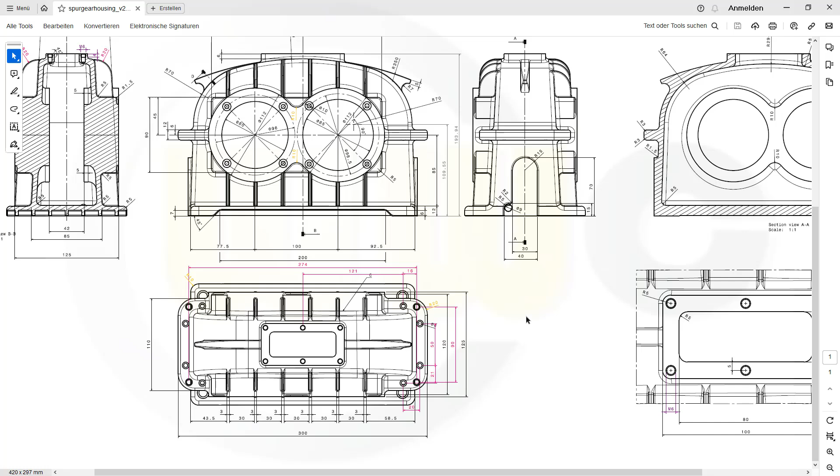I want to create one on this side, on that side, and maybe 2 or 3 here, so one for that reference here, this one and that one, same on the other side, so here, there, and this one. So let's have fun with the first program, and that would be Siemens NX.

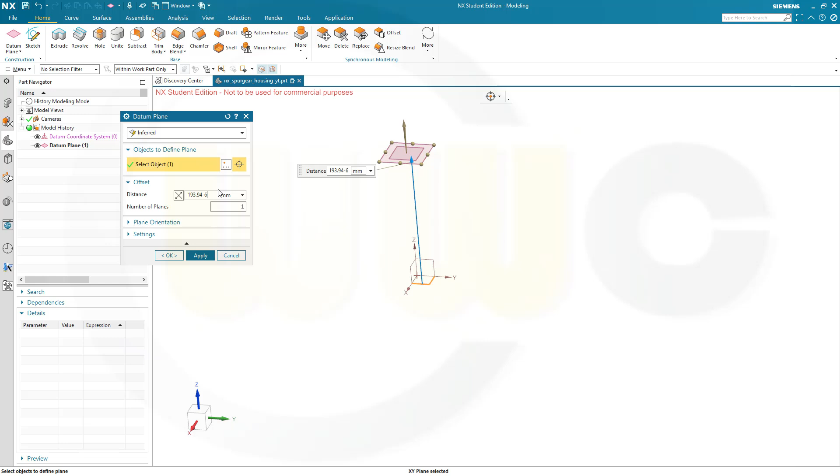Okay, first plane, distance from this one, and this should be 85, sort of the mid plane. Apply. Then another one from this one, and that should be 193.94 minus 6. Apply. And another one at 193.94 and apply.

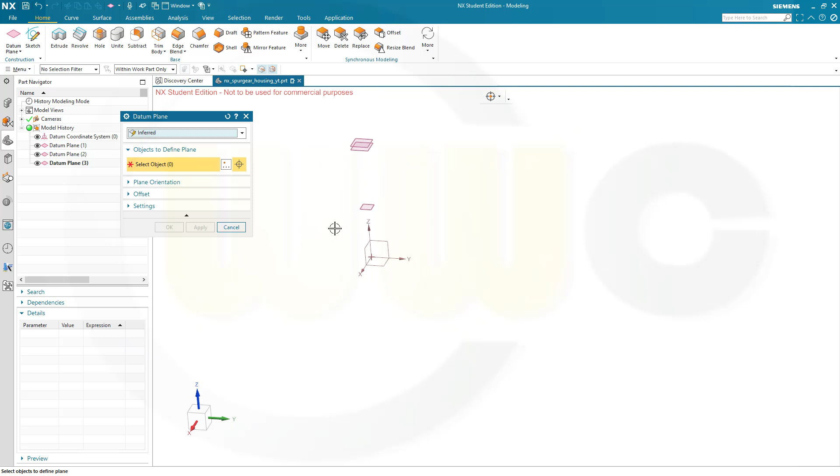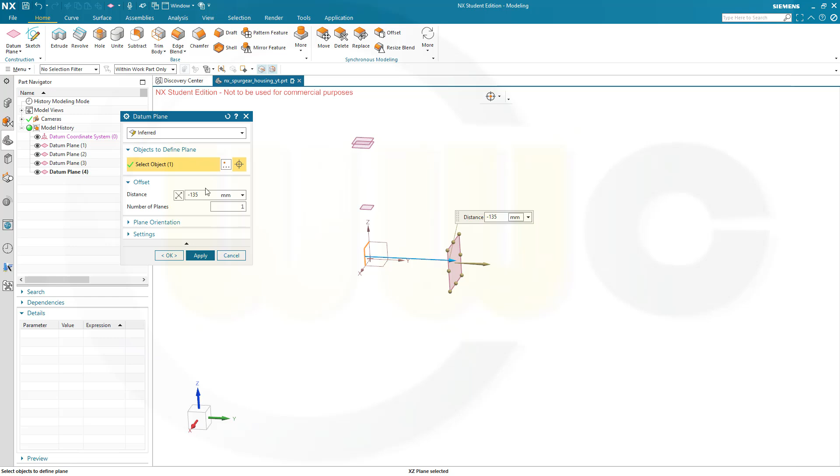Okay, next one, distance from this one, and that would be 135. That's 270 divided by 2 there, that's okay, 135. Apply, and another one to the other side with minus 135. Apply. And one here from that with minus 6, no, minus 12. And okay, and let's change this and move it before the other two. Change the names.

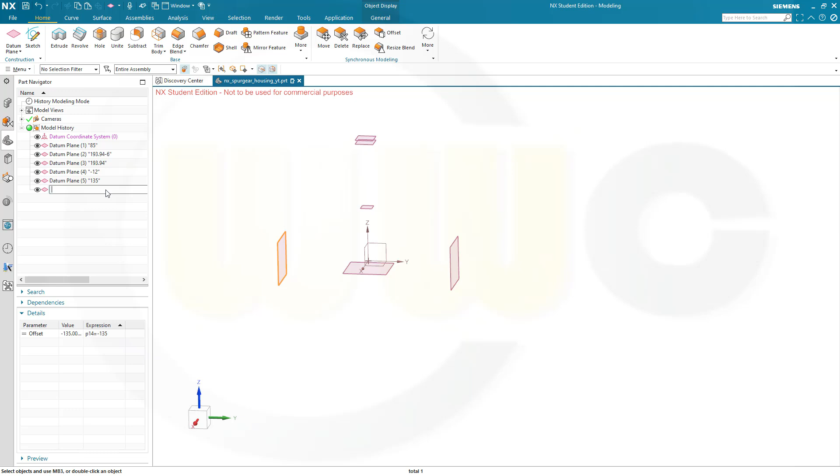So this should be the 85. That would be the 193.94 minus 6 here. This one is the 193.94, so that's the top plane. This would be the minus 12, and that would be 135, and minus 135.

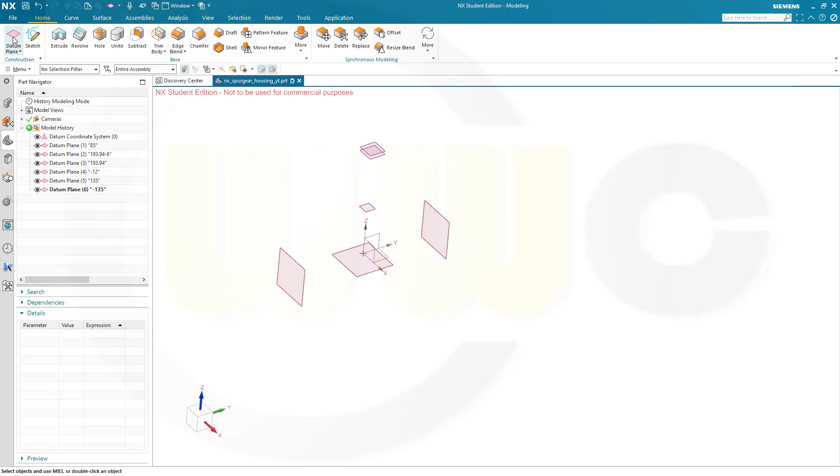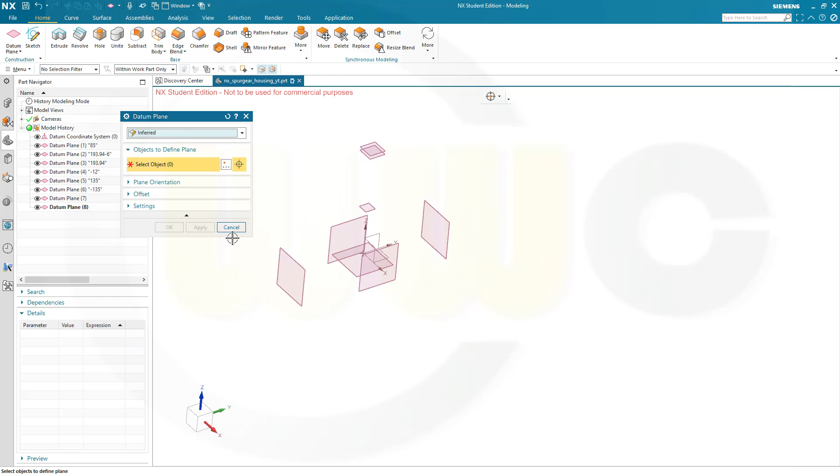I will need some more planes in that direction and in this direction, but I want to check first the dimensions. Okay, that should be 42.5. Apply, and to the other side it should be minus 42.5. So that's the inner one, and then I need 2 more on the outside, and I will do those later on because it's getting too crowded with planes.

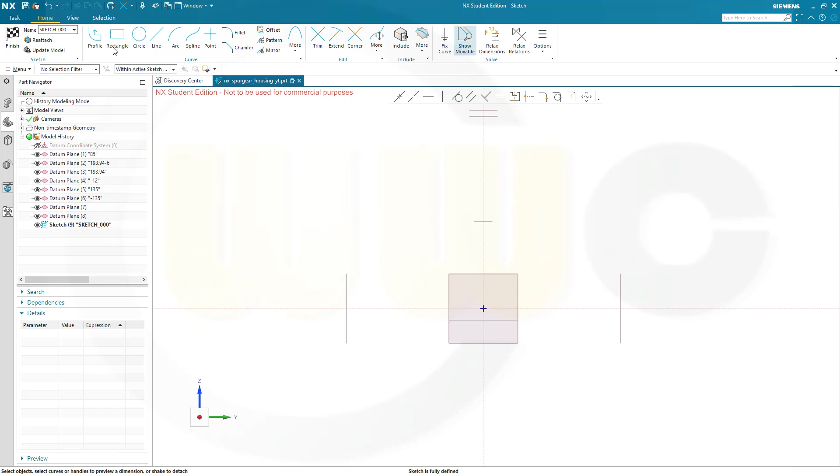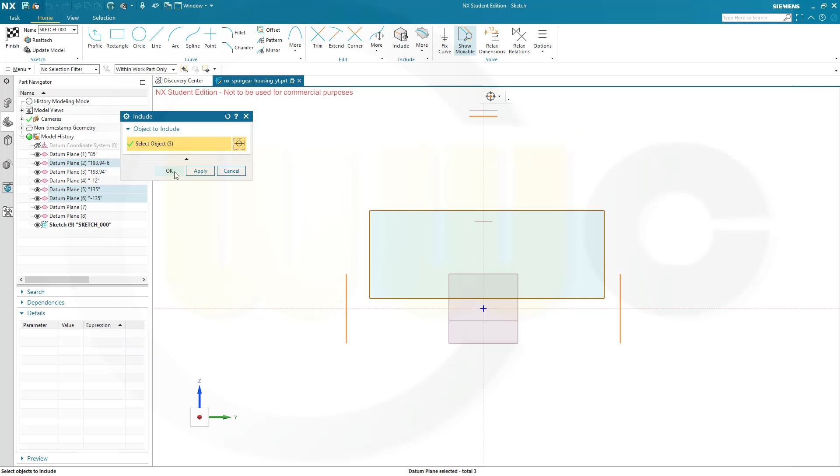Now I can do my first sketch, and that would be of course on the YZ plane. So go for a sketch here, okay, and I need a rectangle which should be aligned with that plane, so include this plane, that plane, and this one here. Yeah, that's the one which is 6 mm below the top plane, and okay, nice. Now these two should be collinear, these two should be collinear, these two and that one should be somewhere up here.

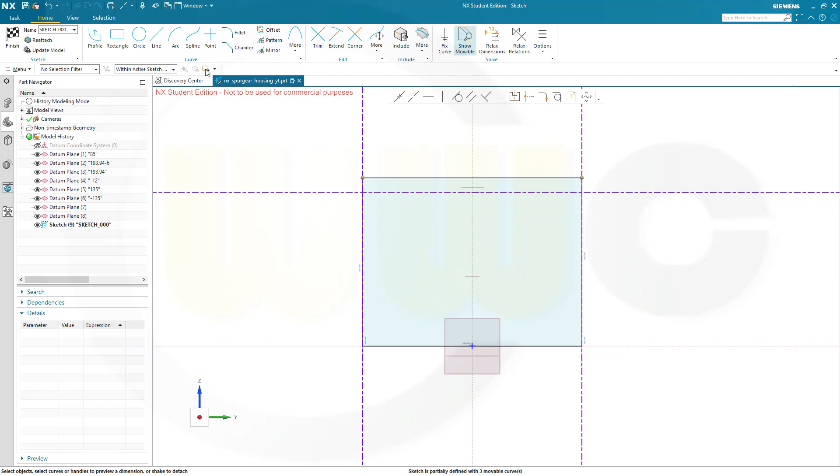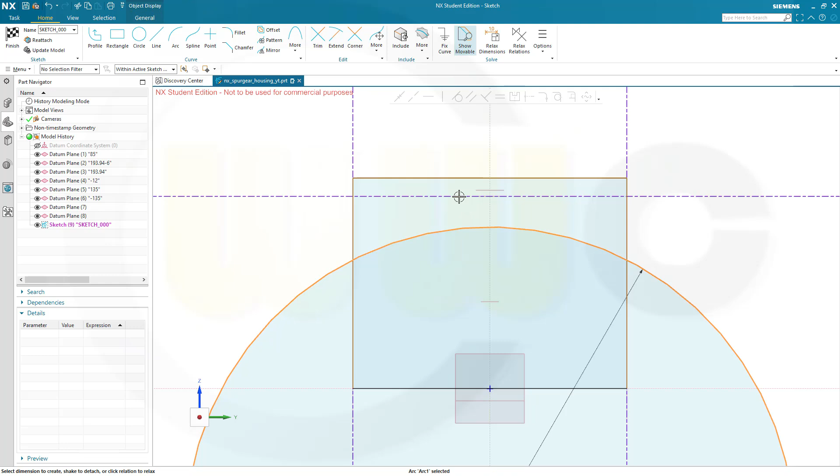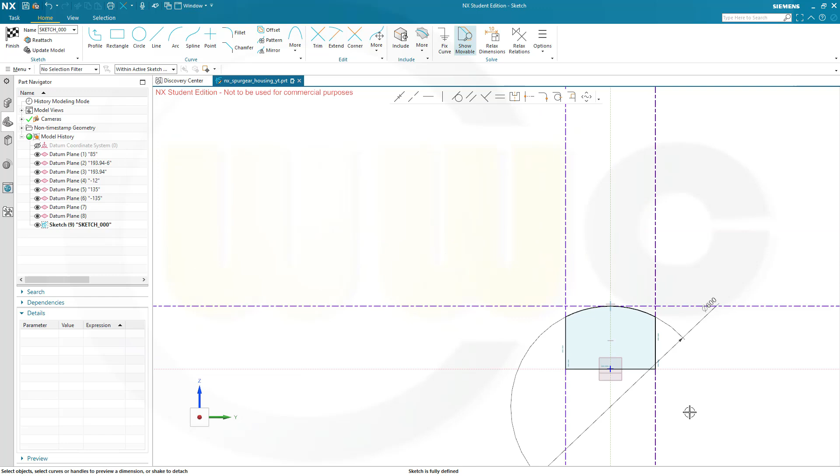I need a circle with a diameter of 600. Let's put it right onto that axis here, and diameter should be 600. And of course this should be tangent to that projected plane. So this circle and that one should be tangent. Great. Now I can trim. So that should be removed. This should be removed, and that one here looks good. Is that center point still there? Let's check it out. It's fully defined, that's okay, yeah.

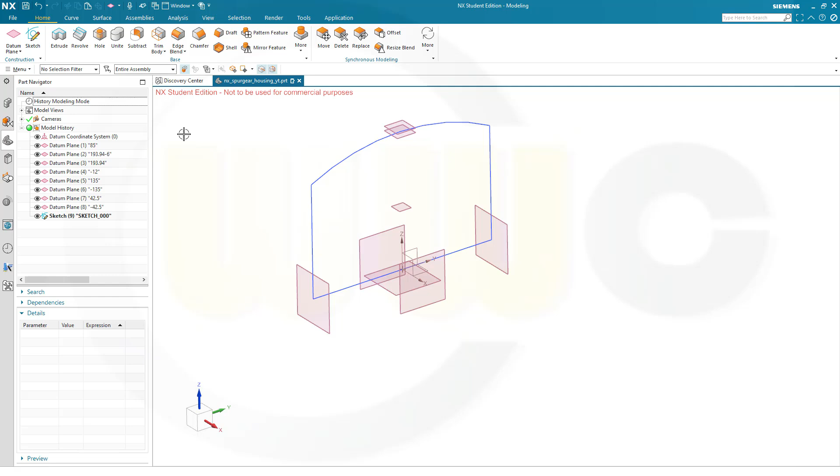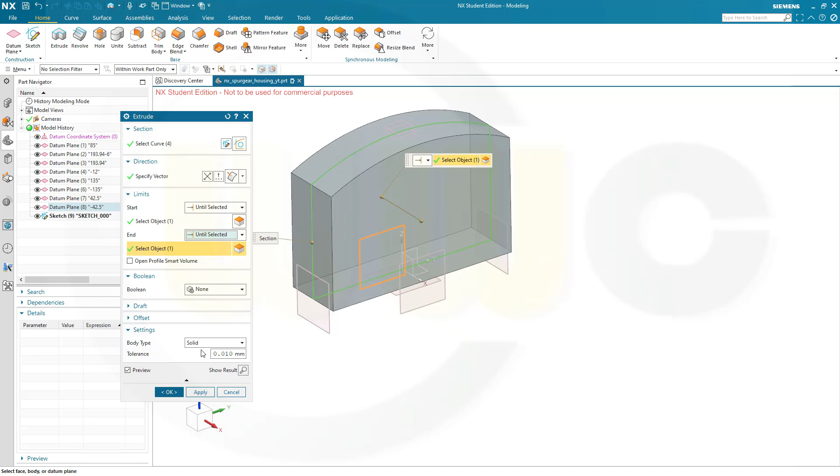Finish that sketch, and now I forgot to rename those. That's 42.5, and this one is minus 42.5, and the first extrude should be limited by those two planes. So let's go for an extrude with that sketch here, and this should go up to that plane, and on the other side it should go to that plane here, and confirm.

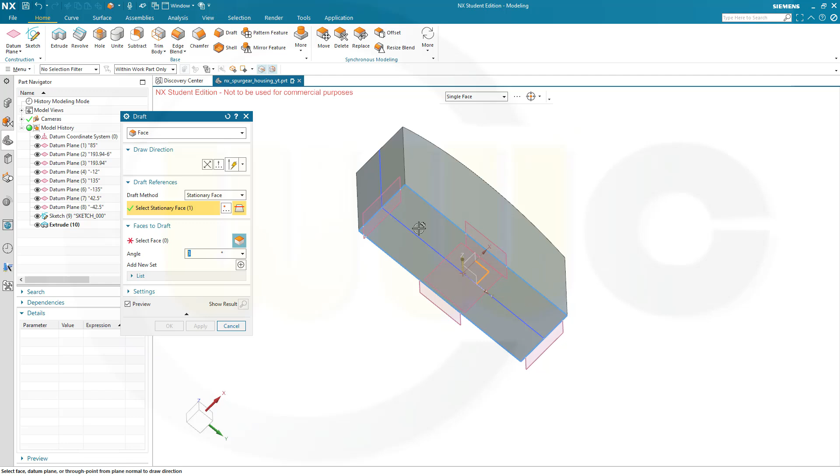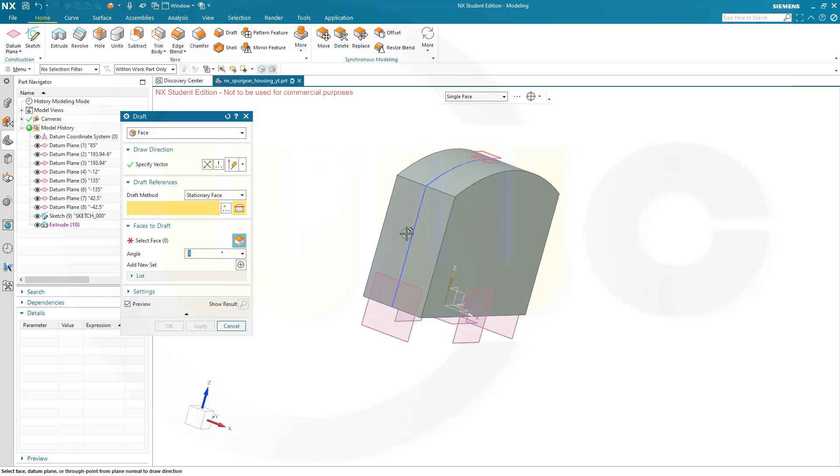Now we will need a draft, so go for draft. Direction, I go for face, yes, direction would be this one. The stationary face would be, of course, that plane here, this one. And I need a draft of 3 on all sides, which is not dimensioned in the drawing, but it's 3 degrees. 1, 2, no, sorry, I've missed. The stationary face is, it didn't switch on its own, so let's select it like that. This one, that one, this one, and that one here. Okay.

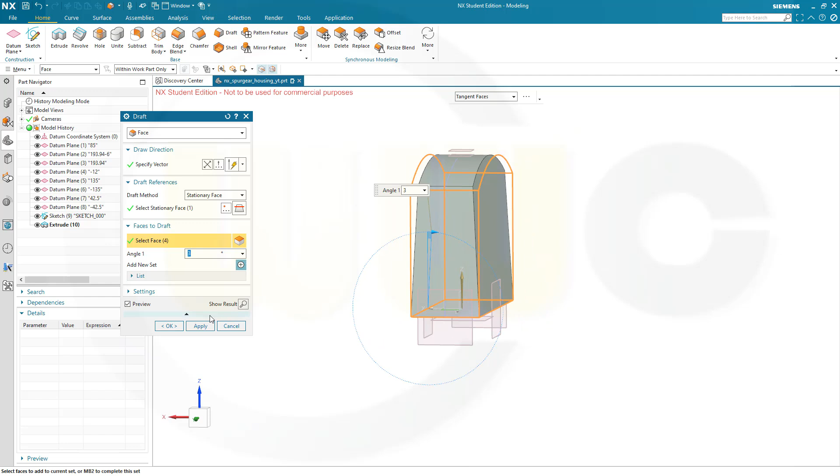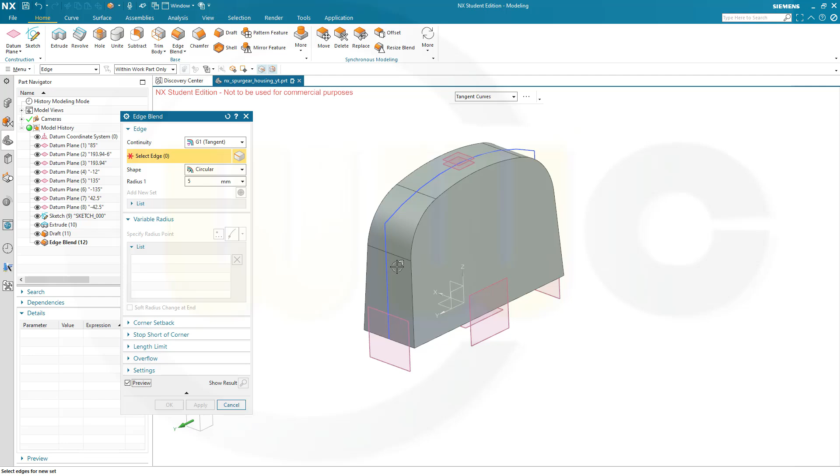Then an edge blend with 70 millimeters on this edge and that edge. Apply, and I suppose it's 5 millimeter on those two edges, and okay, great. First body, let's maybe give it a name. Let's call it, I don't know, the inner body. It's not inside, but it's the inner body.

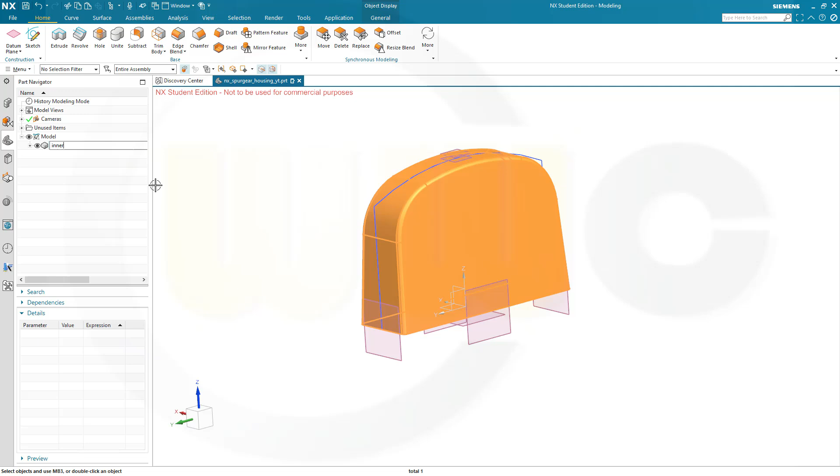Okay, I need another extrude, a new body with the same sketch. So go here, select it, and now this should go to a different plane, and therefore I will have to create that plane here. So this should go 125 divided by 2. Yes, let's check it out. Yeah, I think it's 125 divided by 2. So that would be 62.5.

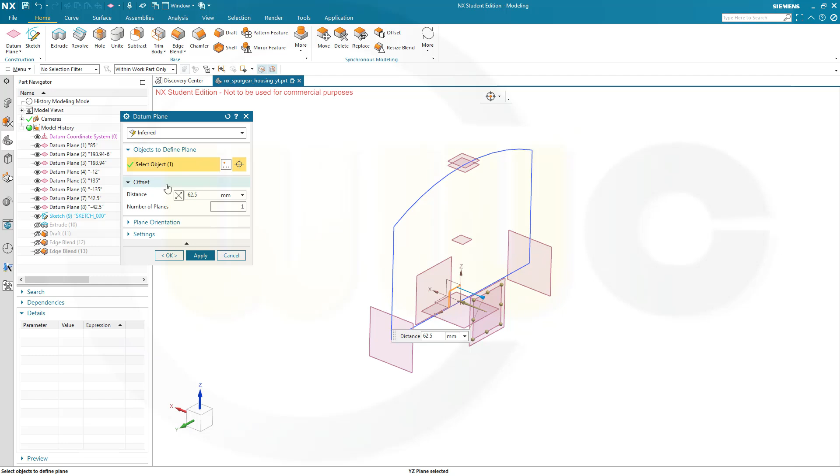So I need a plane distance to this one with 62.5. Apply, and another one with minus 62.5. Okay. Yes.

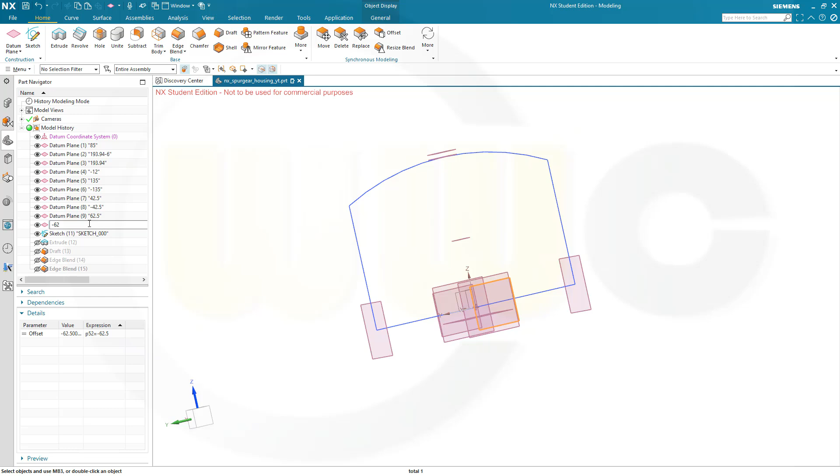Let's move that plane up, the other one as well, and rename it to 62.5 and minus 62.5. Now that extrude with the sketch should go up to this plane, and on the other side to that plane.

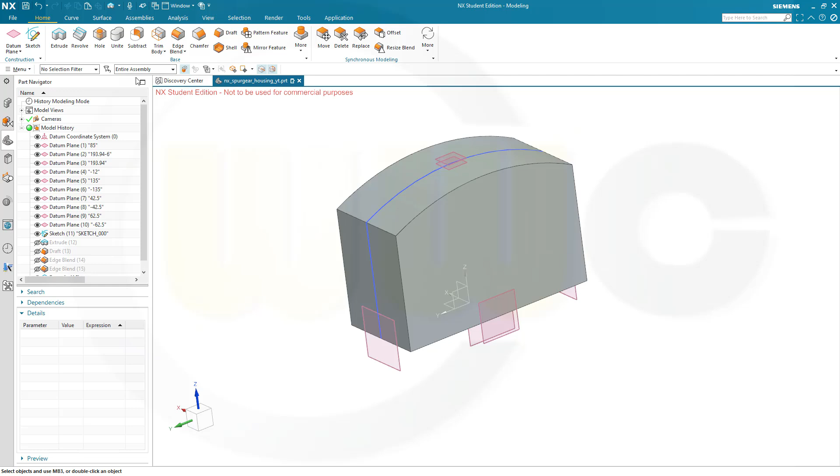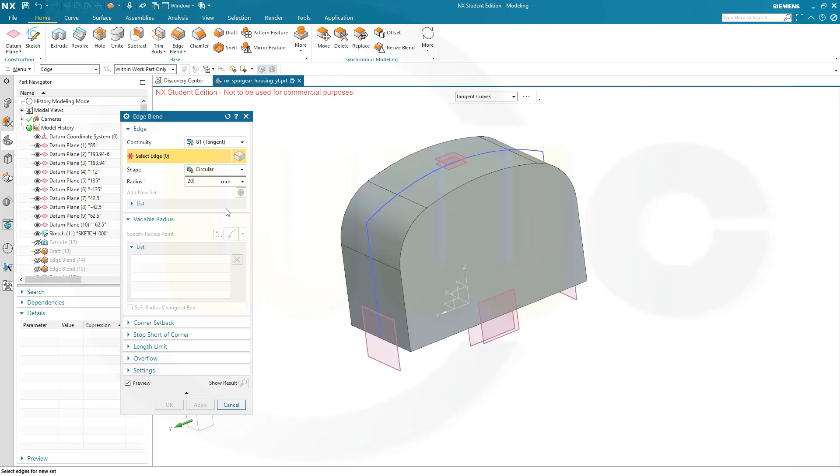Confirm. Add the 70 millimeter fillet on this edge and that edge. Apply, and that should be 20 millimeters because that's the body for the cooling ribs. So here and there, and confirm.

Let's switch to the bodies, and that would be for the cooling ribs. Let's call this cooling. Intersect body. Intersect.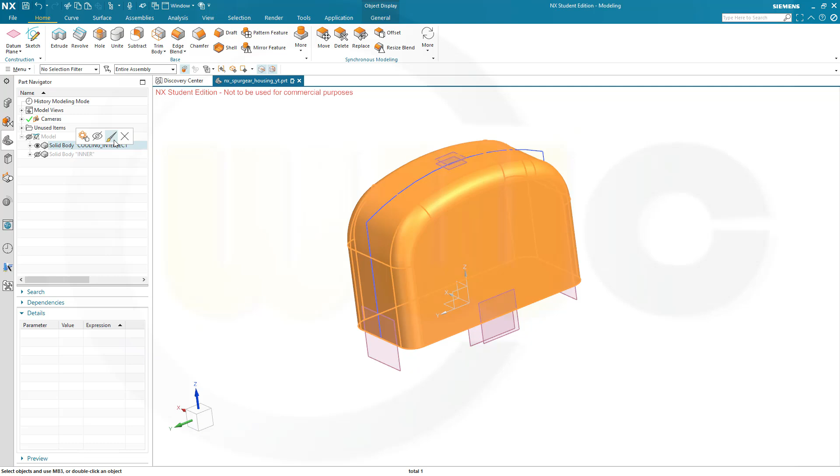And we could make it a little bit transparent so you could see it like that. Yeah, looks good.

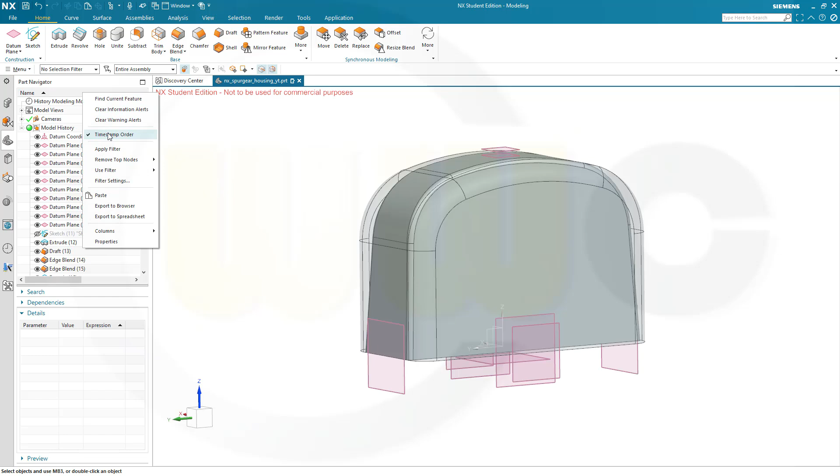Maybe switch and hide the sketch. Okay, let's hide one body, the inner one, and I will need another sketch. You could do it from this point of view or from that point of view. So I want to go for this one here.

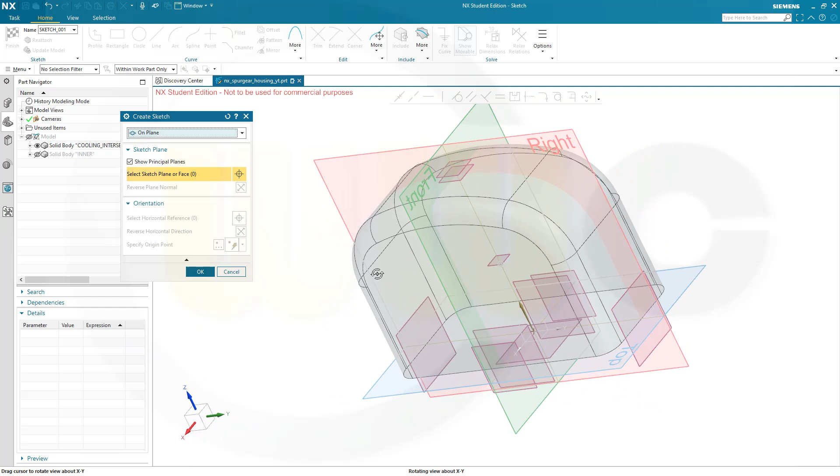I need a sketch on the YZ plane. Here, confirm.

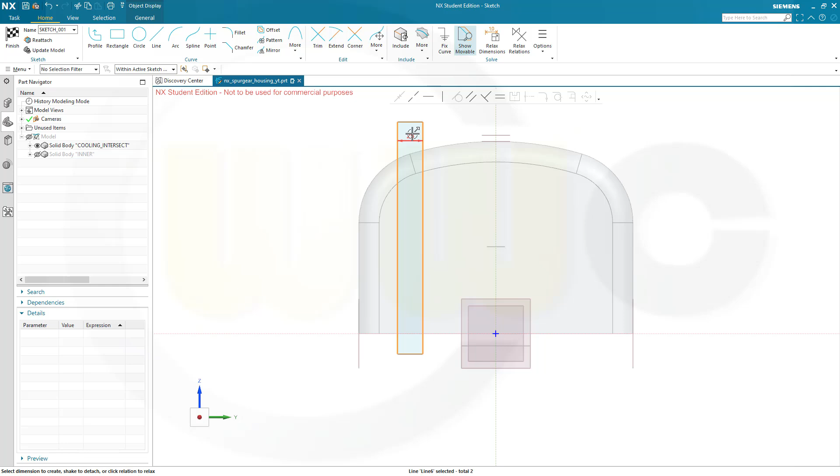And I need a rectangle, maybe like that. This distance here should be 3 millimeter. No. And you could make it bigger, of course, maybe up to this plane.

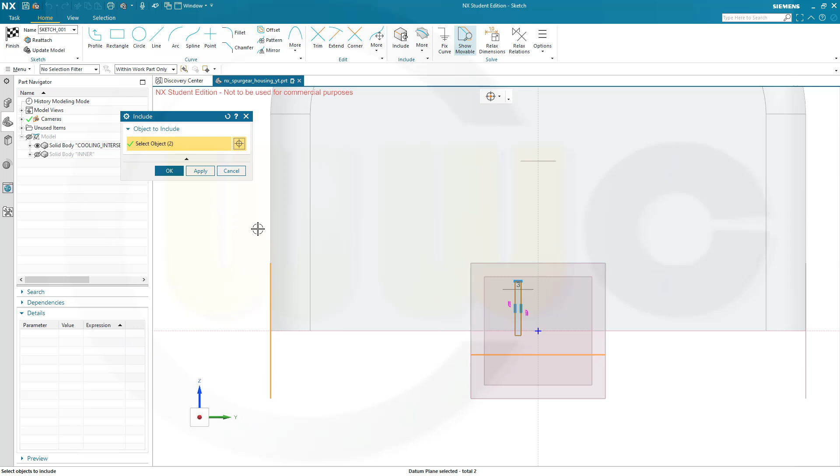That's possible, no problem. So make it, but sorry, this should be 3 millimeter. Yes, scale it, doesn't matter. And I have to include, in order to use it, this plane and that plane here. And maybe the upper one as well would be a good idea. So this one as well, confirm.

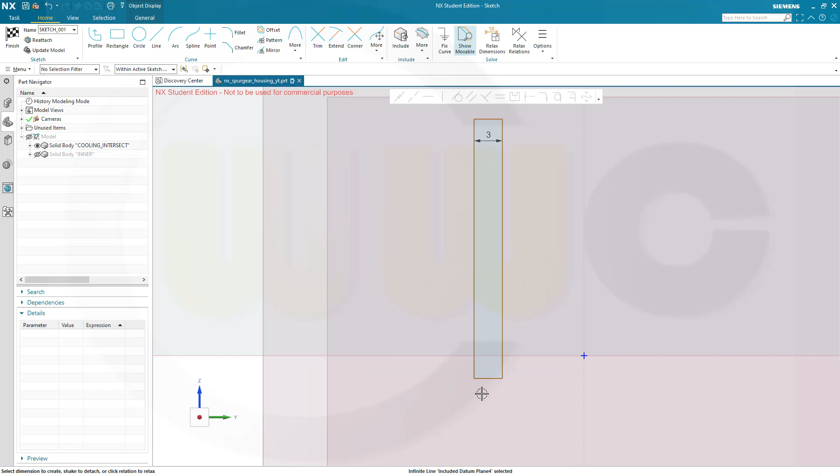Now, so this here and that line could be, so I've selected the point I wanted, yeah, like that. Okay, and this should go up to the top. So select that line and this one here, make it collinear, and the distance from this plane to that here should be

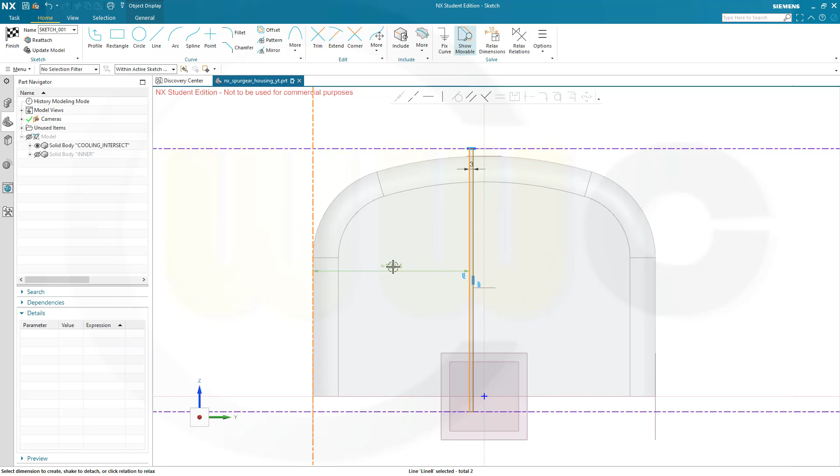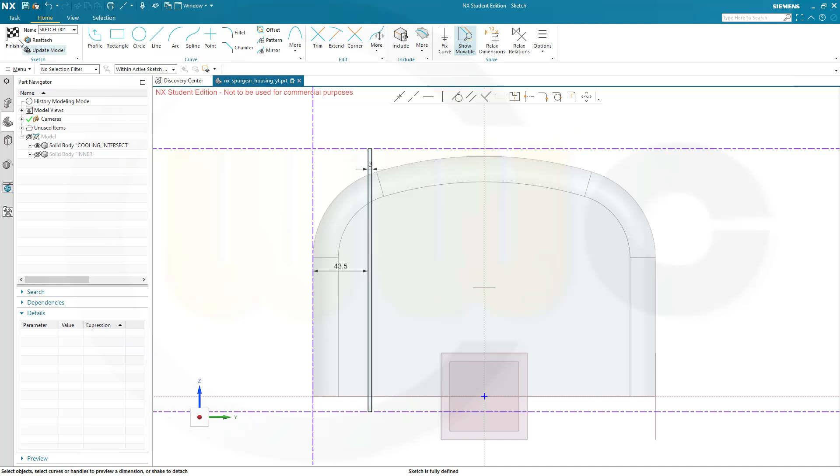43.5, if I'm not mistaken. Yeah, 43.5, like that. This looks good. So finish that sketch here.

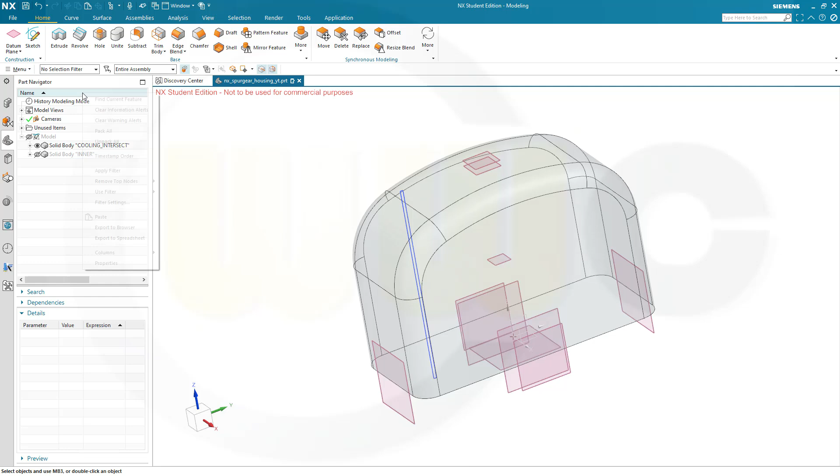Let's make an extrude, and this should be maybe more than to this plane, so I will need 2 more planes. So let's switch timestamp order, add another plane here, and that should be the widest, and that would be the 145 divided by 2.

So that's 72.5. 72.5 in one direction and 1 in the other direction. That would be minus 72.5.

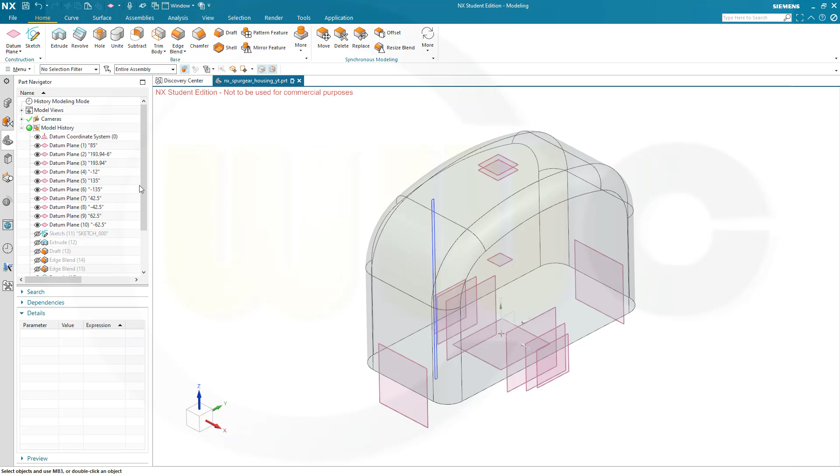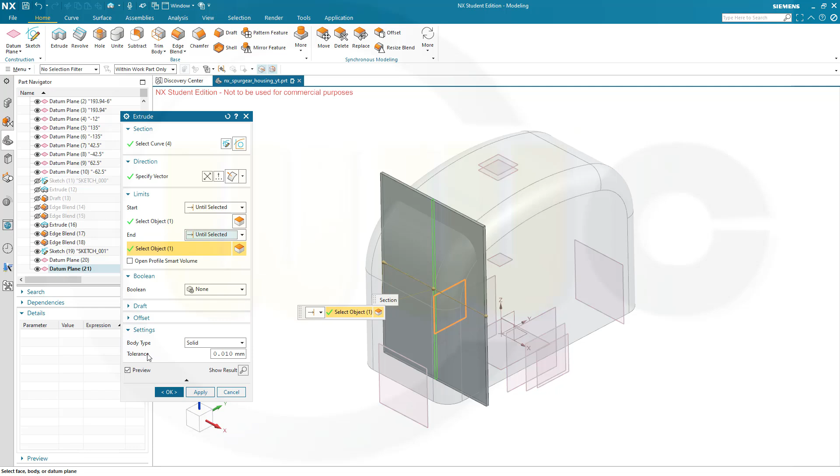And okay. Now let's make an extrude with this sketch here, and that should go until this plane and until that plane. Okay, maybe move them up

and rename them. So that would be 72.5, and this would be minus 72.5.

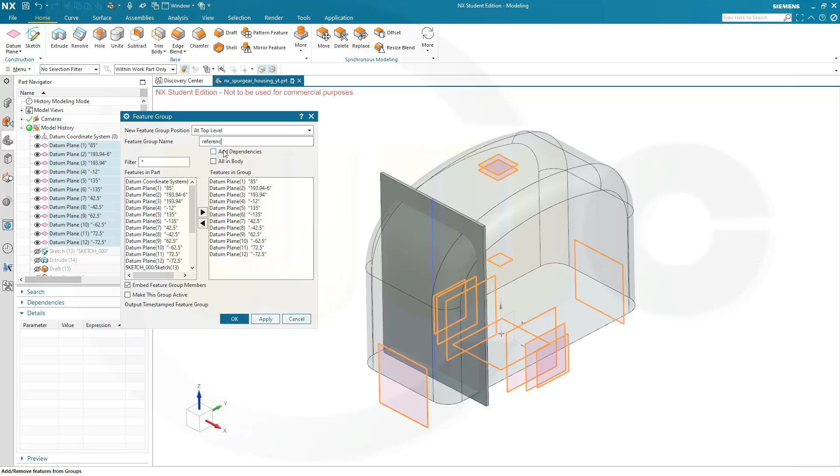And of course I can put all those planes into a feature group. So feature group, reference planes, references, or just references, and confirm. And move that feature group up here.

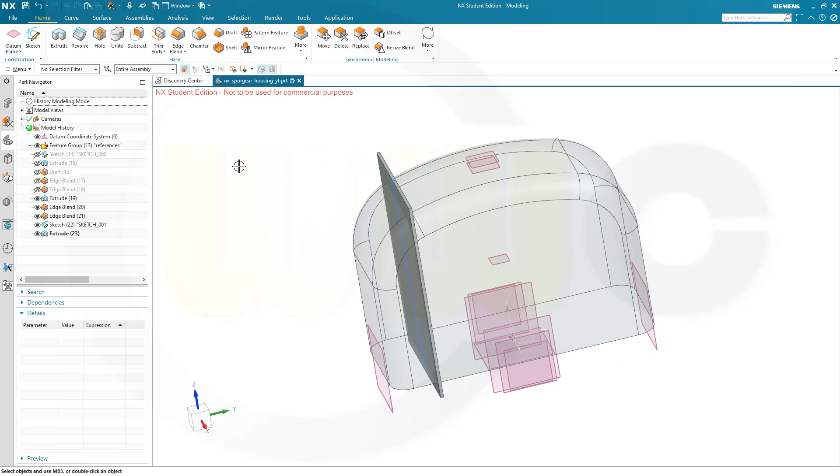That's more like it. Now I will need a pattern, a linear pattern, and a geometry pattern. Yes, so let's go for more pattern geometry, and that would be this geometry, that would be a body, of course. So let's select like that, just to make sure. It's a linear pattern, yes, and the direction would be, of course, the Y direction.

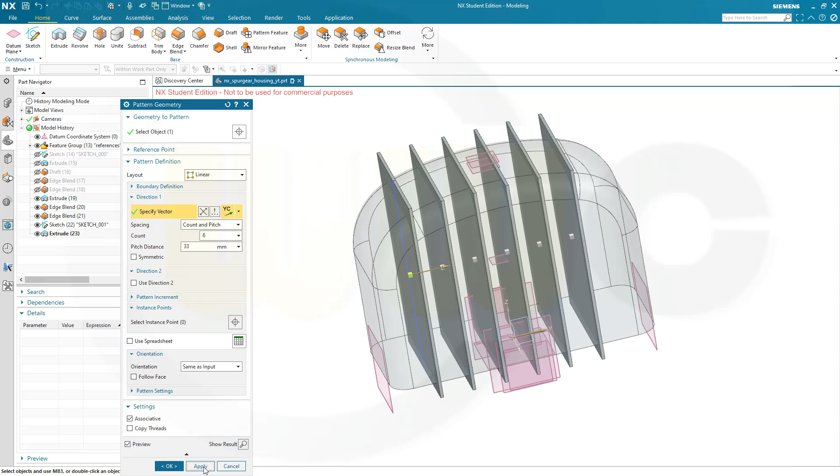That's okay. I want to go for count and pitch. That's okay as well. And I need six instances, and the distance would be 30 plus 3. That's 33 millimeters. And apply, which gives me 6 new solids.

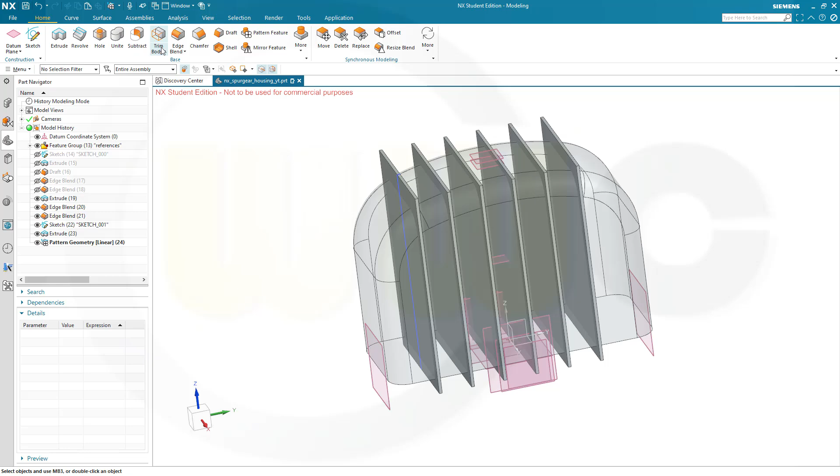And now I can make an intersection with that cooling rib body. And I don't want to keep those bodies because I think I don't need them anymore. So let's go for here intersect, and I want to intersect this body here with those 6 bodies. Confirm.

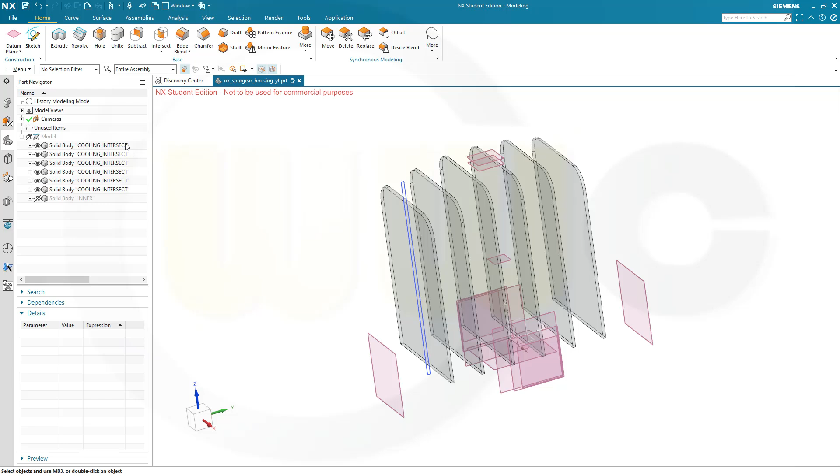Nice. And these should not be as transparent, so let's switch to timestamp order and select those 6 bodies and change them to 0 translucency. Okay, bring back this one.

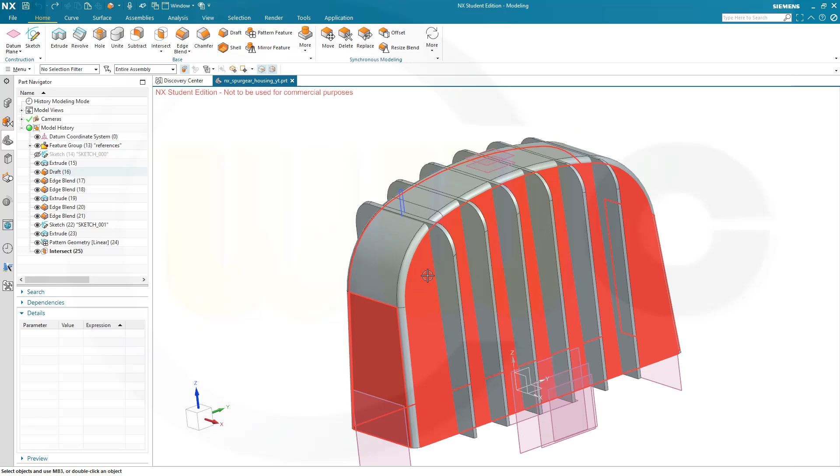And I've just noticed I've missed the second draft. I wanted to do a draft after this extrude, but that's not a problem. So just go to that extrude, make it the current feature, and add the draft with 3 degrees.

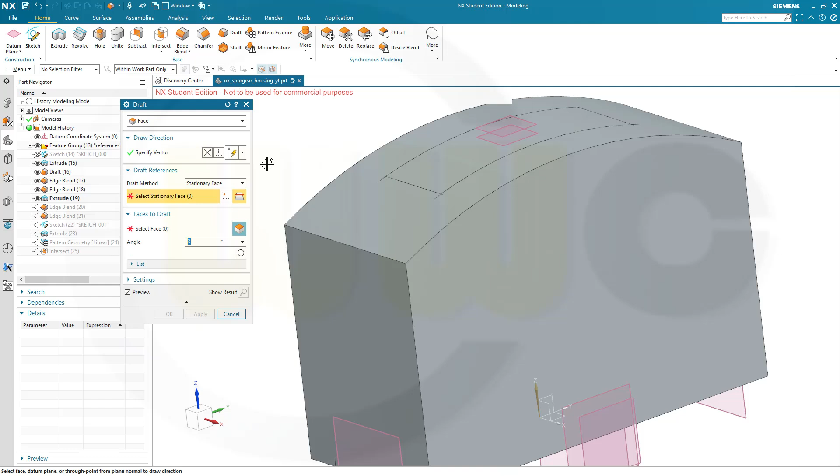So that would be the direction. Stationary face would be again this plane, and I want to draft this side, this side, and that one here, and confirm. Okay, and let's go back and make this the current feature, and now that's more like it. Yes.

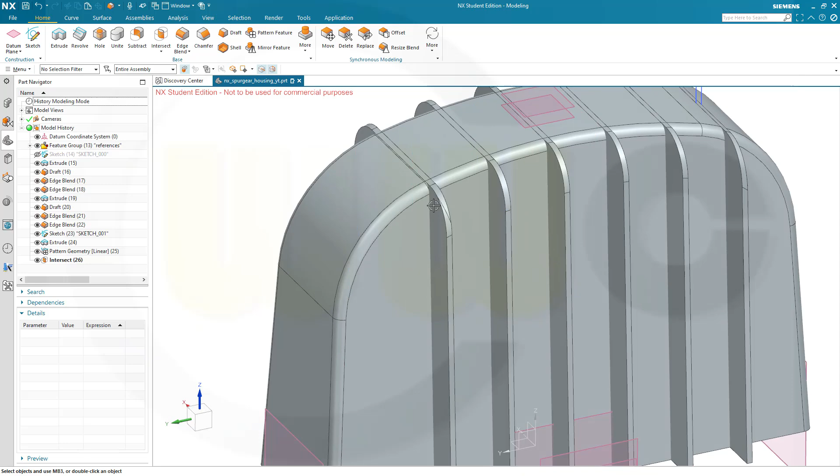And this concludes the first part of this Siemens NX Spur gear housing. Hope this was helpful. Hope you liked it.